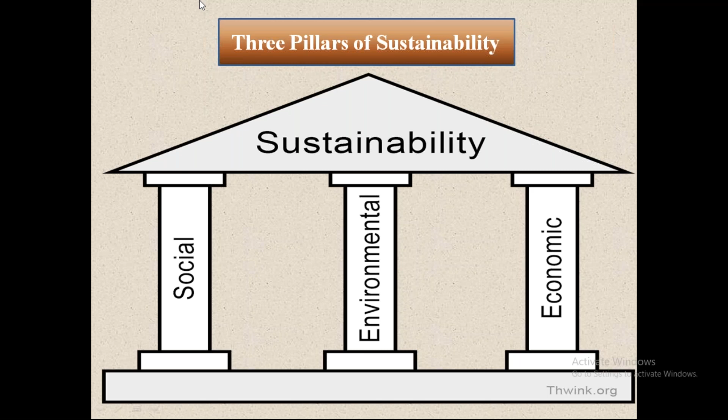Under sustainable development, we have sustainable construction, which is defined as the practice of creating structures and using processes that are environmentally responsible and resource efficient throughout a building's life cycle, from siting to design, construction, operation, maintenance, renovation, and deconstruction.

So there are various ways we can deal with this, and sustainable construction will include methods that use renewable and recyclable sources, reducing energy consumption and waste, creating a healthy, environmentally friendly environment, and protecting the natural environment.

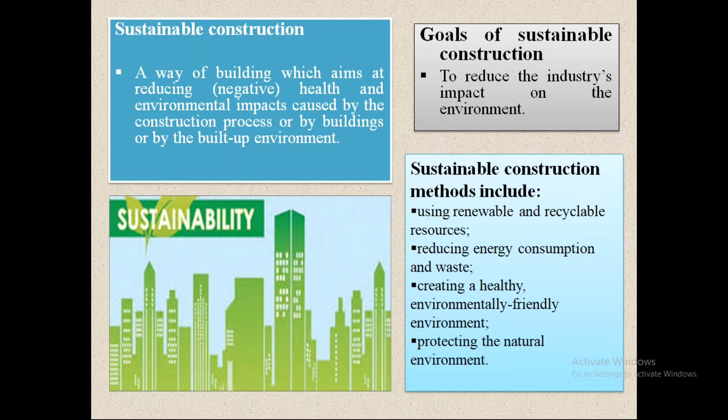So why do you think that wastes are necessary to be incorporated in construction in addition to the regular materials? You can write in the chat box so that once we discuss the wastes, we can move ahead.

Sir, your mic is off, sir. No problem, I'm waiting. I'm waiting for the people to write. Okay fine sir, fine.

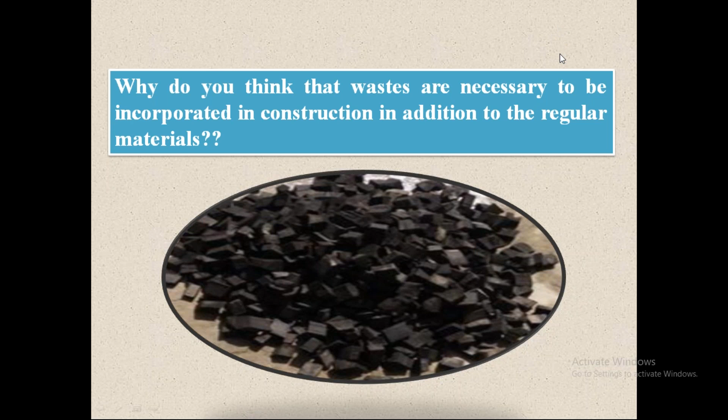As far as wastes are concerned, they are classified into two categories: agro wastes and industrial wastes. Agro waste includes rice husk ash, corn cob ash, and some others like sugarcane bagasse ash and banana leaves ash. Industrial waste includes fly ash, ground granulated blast furnace slag, and silica fume.

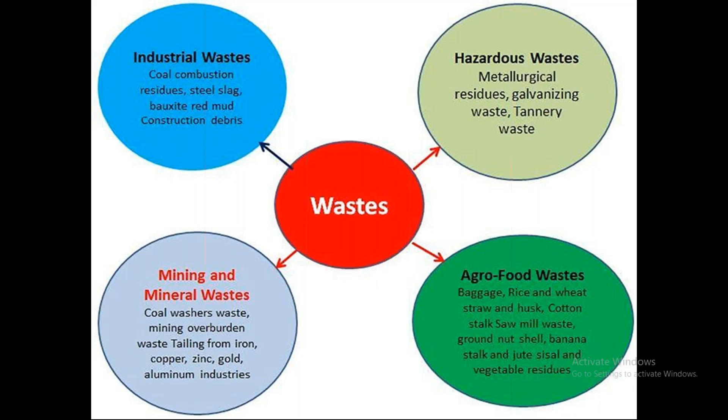So waste can be categorized, and our intention should always be to utilize these wastes. A lot of studies have been carried out regarding these wastes, and we should select the waste in such a manner that we are able to substitute it.

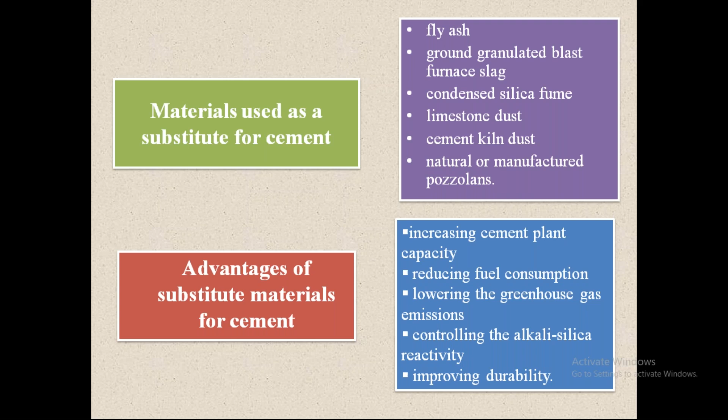As far as cement is concerned, we can use fly ash, ground granulated blast furnace slag, condensed silica fume, cement kiln dust, etc. So what we are doing is substituting materials for cement, reducing greenhouse gas emissions, controlling alkali silica reactivity, and improving durability.

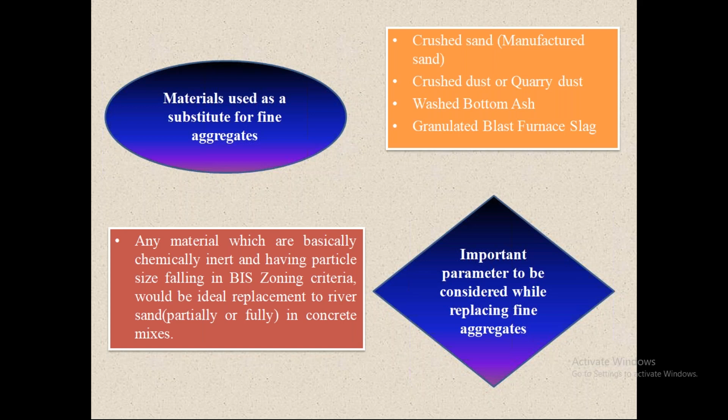Materials we can substitute for fine aggregates include crushed sand, crushed dust or quarry dust, and granulated blast furnace slag. We have to look for the right parameter while replacing materials. When replacing fine aggregates, we need a material that is chemically inert and has a particle size falling in BIS zoning criteria, preferably zone 2, to be an ideal replacement for river sand in concrete mixes. Similarly for coarse aggregates, we can replace them with different materials.

A lot of study has been carried out regarding wastes. Today I'll concentrate on the latest study using only two wastes. First I'll discuss regarding fly ash, and then I'll discuss regarding rice husk ash.

The normal study regarding waste has been published before, but regarding geopolymers, it's a new concept. Only in the last two years has the study started in India regarding geopolymer. We basically carry out geopolymerization, using alkaline activators to achieve geopolymerization. Geopolymer cement concrete is made from utilization of waste materials.

It can be fly ash, it can be rice husk ash, it can be GGBS.

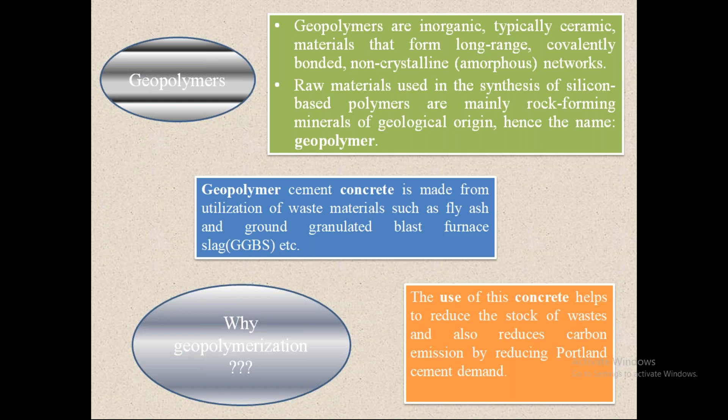In alkali activation, we are mainly dealing with molarity, the number of moles of solute per liter of solution. It is used to express the concentration of solution. The molarity of solution is the way to figure out how much of a specific element or compound has been dissolved or used in a certain amount of solution.

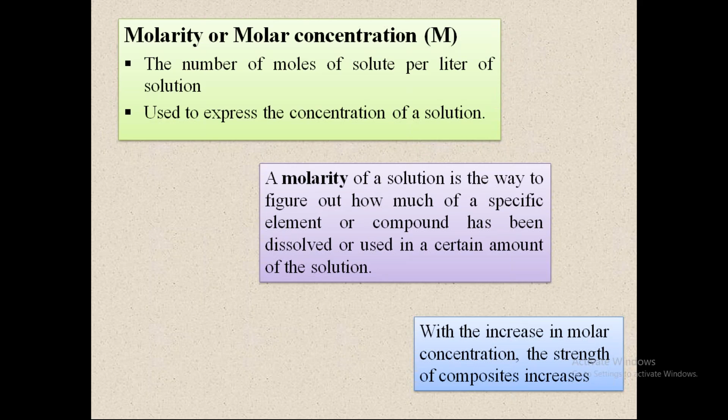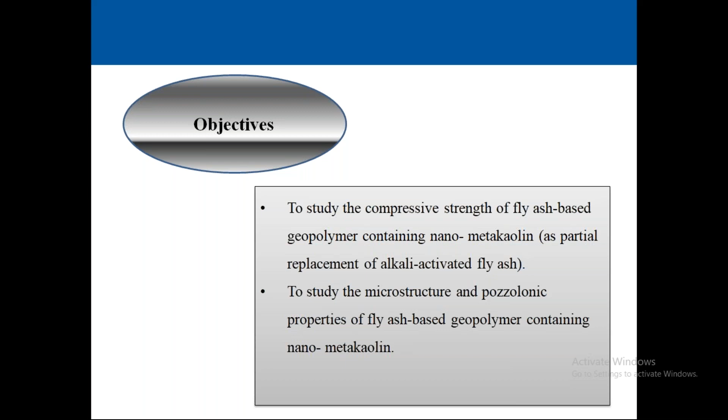So this is what I'll be discussing today, regarding alkali activated fly ash. There are two objectives: to study the compressive strength of fly ash based geopolymer containing nano-metakaolin, and then to study the microstructure and pozzolanic properties of fly ash based geopolymer containing nano-metakaolin.

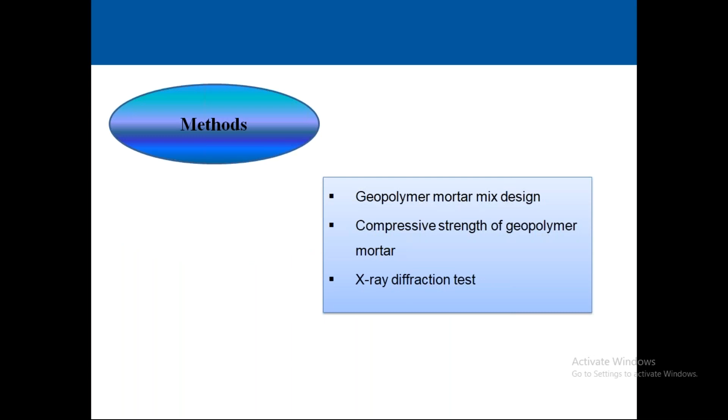So the materials used are fly ash, alkaline activator solution, nano-metakaolin, fine aggregates, and water. These are the methods: geopolymer mortar mix design, compressive strength, then the XRD thing. So geopolymer mortar is a two-phase material similar to conventional Portland cement mortar, consisting of geopolymer binder and aggregates as source and filler materials respectively.

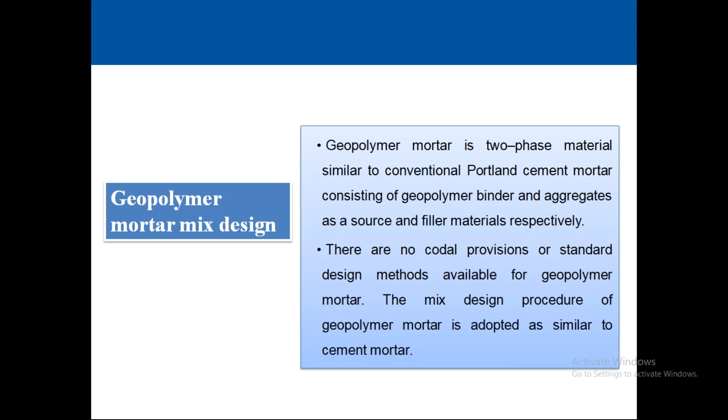There are no codal provisions or standard design methods. So what we have done is we have adopted the same procedure as that of cement mortar, but we have activated the fly ash with the help of alkaline activator, and we have conducted the study.

So the major components which affect the strength of geopolymer mortar mix are geopolymer binder to sand ratio, water to solid ratio, alkaline activator solution to fly ash ratio, sodium silicate to sodium hydroxide ratio, and molar concentration or molarity of sodium hydroxide. All the above discussed ratios were fixed in the study, but the molarity was varied in order to see the effect of alkaline activator solution.

So fly ash samples were prepared regarding geopolymer, and as far as preparation of the samples is concerned, first of all, the standard consistency of the fly ash was determined by taking approximately 400 grams of fly ash, and with the help of a Vicat mold we have done that. Then initial and final setting time was determined.

Preparation of fly ash based geopolymer mortar was difficult because we had to make a lot of trials. First of all, fly ash to sand ratio was selected. Then alkaline activator solution to fly ash ratio was selected, based on the consistency, and it was checked for strength requirement and workability requirement. Then sodium silicate to sodium hydroxide ratio was selected.

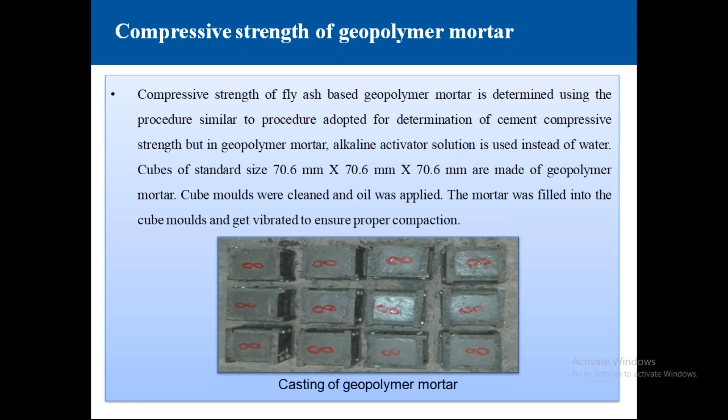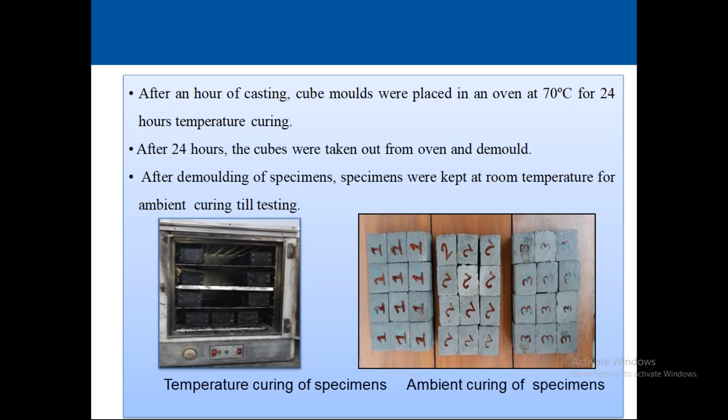Cubes of standard size were used, and after an hour, cubes were placed in an oven at 70 degrees centigrade for 24 hours temperature curing. After that, cubes were taken out, and after demolding, specimens were kept at room temperature for ambient curing till testing. Specimens were tested after 3, 7, 14, and 28 days. The compressive strength of the mortar cubes was found using UTM.

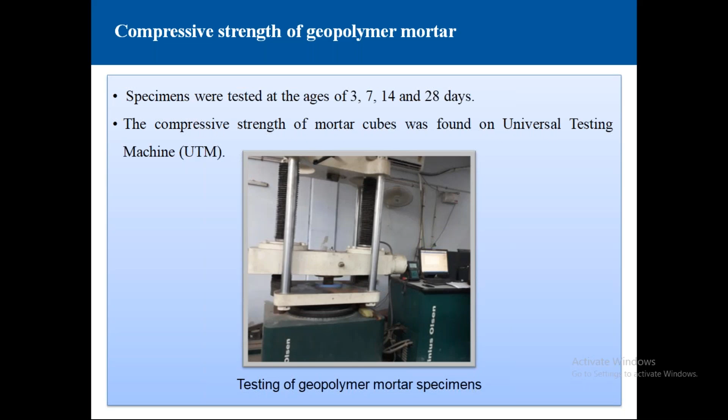So the next part which we have used is regarding X-ray diffraction, XRD. It is a non-destructive test method used to analyze the structure of crystalline materials, and by studying it, we are able to identify the crystalline phases present in a material, and thereby know the chemical composition information. It's a non-destructive analytical technique used for analyzing crystal structure, mineral composition, and unit cell dimensions.

X-ray diffractometers mainly consist of three components: cathode ray tube, X-ray detector, and sample holder. X-rays produced in the cathode ray tube are detected, processed through the X-ray detector, and recorded in the form of intensity. Conversion of diffraction peaks to D-spacings allows identification of the mineral, because each mineral has a set of unique D-spacings.

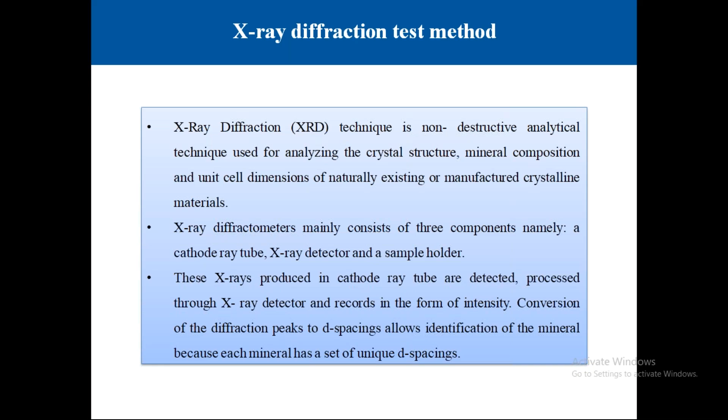This technique is basically primarily based on Bragg's law, that is n lambda equals 2d sine theta, where lambda is the wavelength of X-ray, theta is the diffraction angle of the incident ray, and d is the lattice spacing between the planes in a crystalline sample.

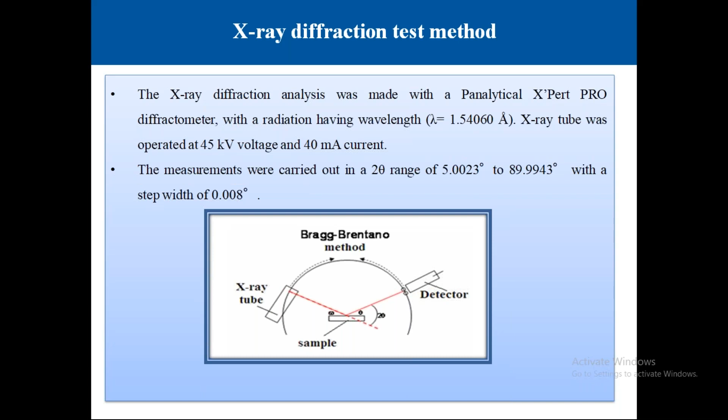The X-ray diffraction analysis were made with a diffractometer with the radiation having wavelength lambda equal to 1.54 angstrom. The X-ray tube was operated at the standard conditions for operating the X-ray diffraction apparatus. These measurements were carried out in a 2 theta range, which we can vary from 5 degree to 89 degree, with a step width of 0.008 degree.

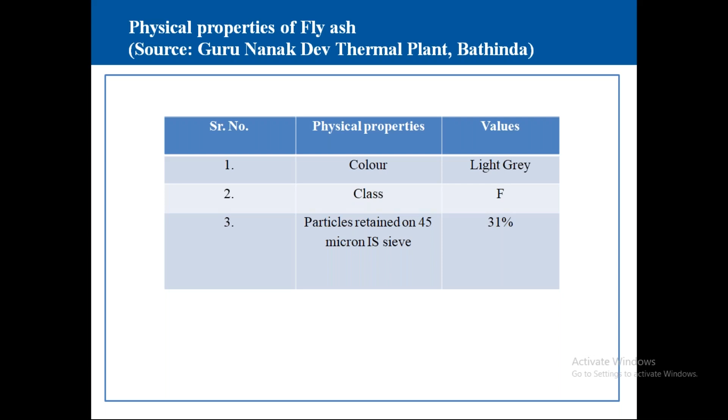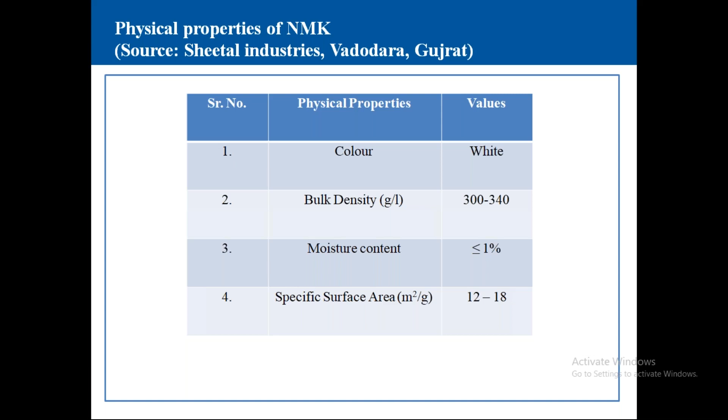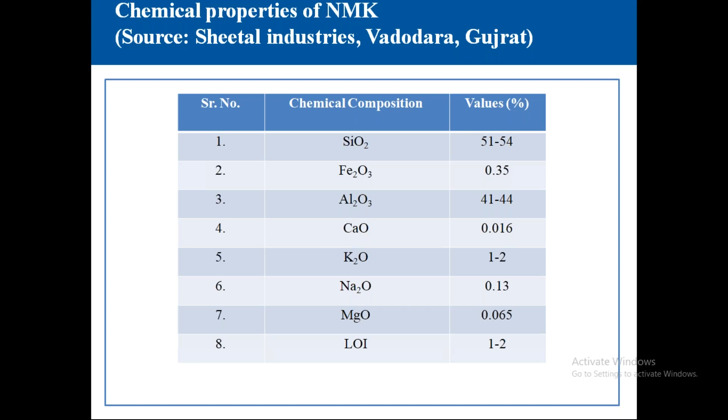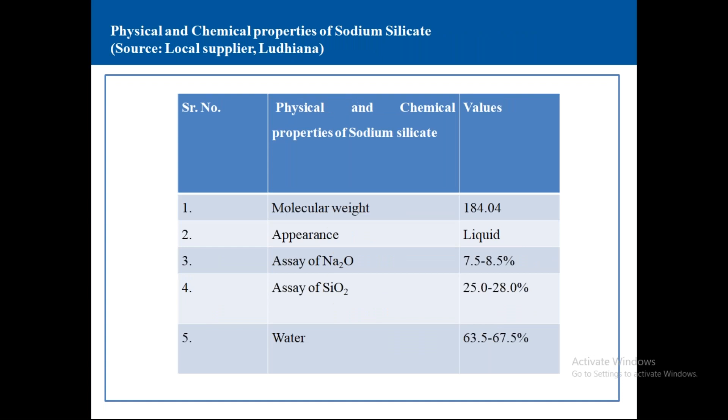Then we have given certain names to the mixes, and to determine the value of compressive strength of fly ash based geopolymer mortar, 18 mixes were prepared by using different molar concentrations. Molar concentrations which were chosen were 12 M, 14 M, and 16 M. So cement and water present in the cement mortar were replaced with fly ash and alkaline activator solution respectively.

The alkaline activator solution to fly ash ratio was kept as 0.4, sodium silicate to sodium hydroxide as 2.5, and water to solid ratio as 0.3 respectively. So in all we have casted 216 specimens of geopolymer mortar, varying molarity of the hydroxide and percentage of NMK with fly ash. So the nano metakaolin was varied from 0 to 10% with different molarity 12, 14, and 16.

Nano metakaolin was replaced with fly ash, that means totaling 100. First of all, nano metakaolin was 0, fly ash was 100%. Then 2, fly ash was 98; 4, 96; 6, 94; 8, 92; 10, and 90. So S1 to S6 correspond to 12 molarity. S7 to S12 correspond to 14 molarity. S13 to S18 correspond to 16 molarity. So this was the designation of the geopolymer mortar mix.

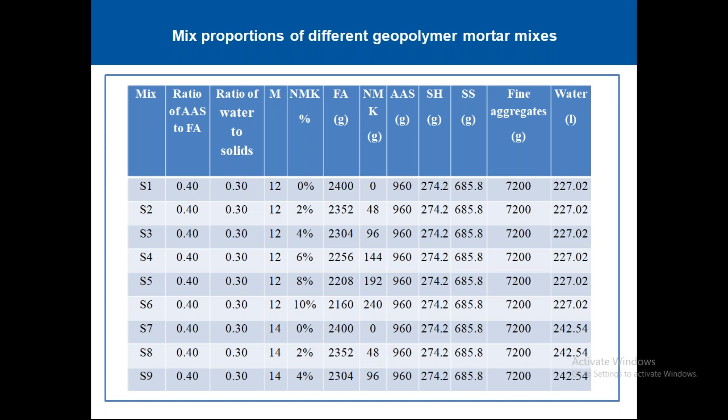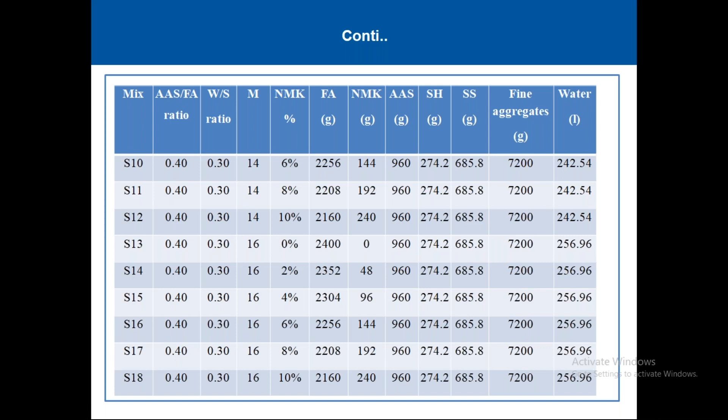Their ratio was also kept as 2.5, depending upon the consistency, depending upon the trials, and depending upon the various research papers. So overall, this was the thing. We have calculated the different quantities, and with the help of alkaline activator, we have casted the samples, and then we have tested the compressive strength.

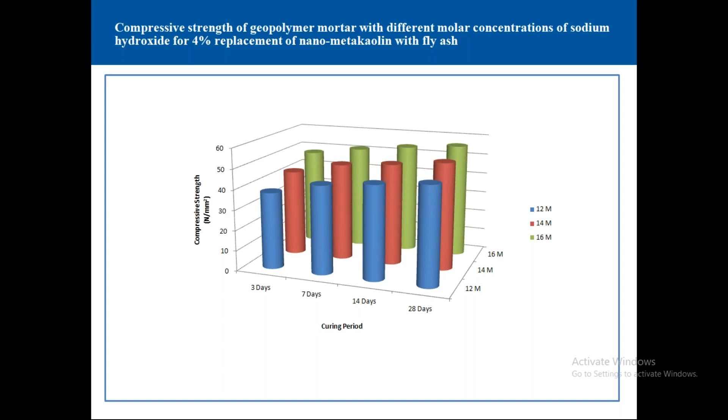Similarly, for 4% replacement of nano metakaolin, 28 days compressive strength of 14 molarity was 1.09 times, and for 16 molarity it was 1.16 times. Again, for 6%, corresponding to 14 molarity it was 1.15 times, and corresponding to 16 molarity it was 1.3 times. Then for 8%, then for 10%.

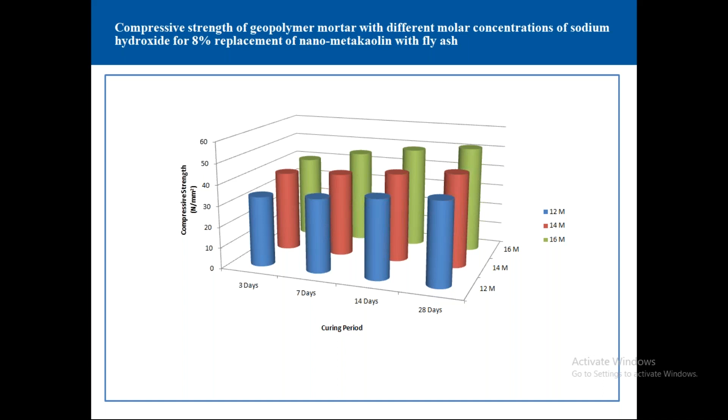So it can be concluded that compressive strength of fly ash based geopolymer mortar is directly dependent upon the molar concentration of alkaline activator solution. As molar concentration increases, it enhances the geopolymerization reaction by escalating the dissolution of alumina and silica present in the source material, which we call fly ash.

The increase in compressive strength of fly ash based geopolymer mortar with different percentage levels of nanometakaolin is due to the contribution of silica and alumina oxide of nanometakaolin (NMK) in the geopolymerization process. There is a significant increase at 4% NMK. It is due to homogeneous dispersion of NMK, leading to formation of nucleation material for geopolymer formation.

A compact structure was formed. However, if the content of NMK is very high, it results in the formation of agglomerates that hinder the contact between reactive components of the geopolymerization reaction. So this is for 16 molarity. For 16 molarity also, 4% NMK was found to be optimum.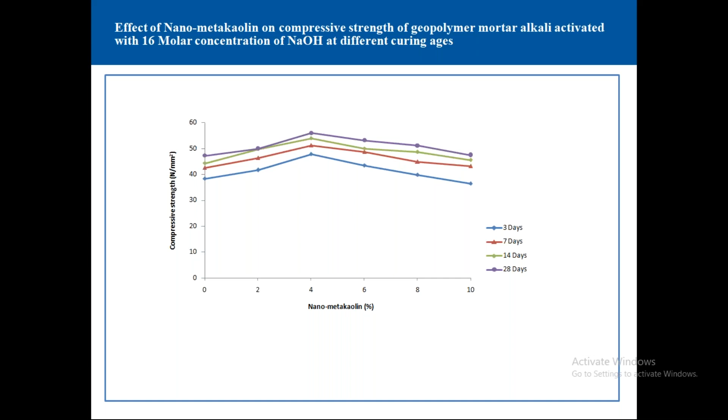Again, after conducting the tests, we performed regression analysis. From the regression analysis, we have computed a graph and formed an equation from which we can find the value of compressive strength for different molar concentrations of sodium hydroxide and for different proportions of nanometakaolin.

So this is the measured compressive strength. Then we have predicted compressive strength. Then we have the residual values. Depending upon those residual values, we can find the integral absolute error. When we say integral absolute error, if it is less than 10%, it is always better. It is considered to be significant.

So this error measures the absolute deviation of experimentally measured values from the values obtained using regression analysis. The range of 0 to 10, as I already told you, is regarded as acceptable. Our value was 5.73%, so it is within the acceptable range.

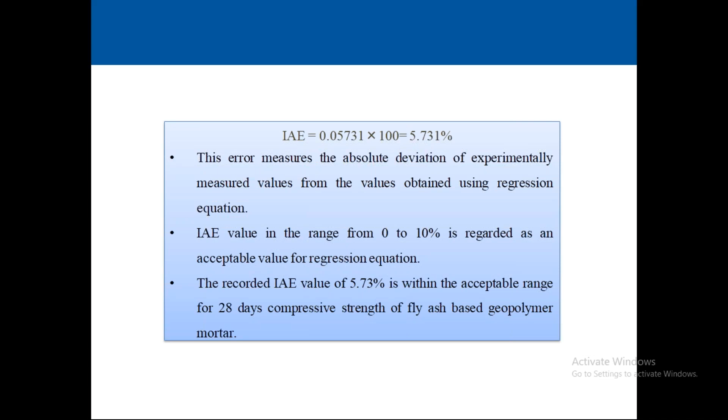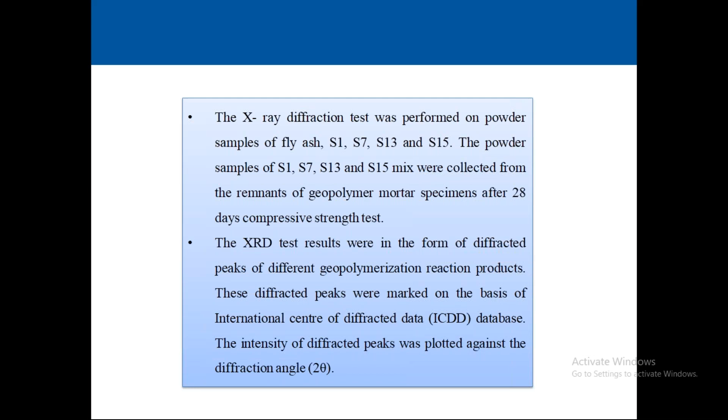So again, the X-ray diffraction test was performed, as I already told you. The X-ray test results were in the form of diffracted peaks of different geopolymerization reaction products. These diffracted peaks were marked on the basis of the International Centre for Diffraction Data (ICDD) database. Intensity of diffracted peaks was plotted against the diffraction angle. So this shows the X-ray pattern.

X-rays are diffracted differently by each mineral based on the atoms present and their arrangement in the crystal lattice of the mineral. If you look at the fly ash X-ray pattern, in its normal state it's mainly composed of amorphous and crystalline substances such as quartz and mullite. This shows there are numerous peaks of mullite and quartz in the crystalline phase.

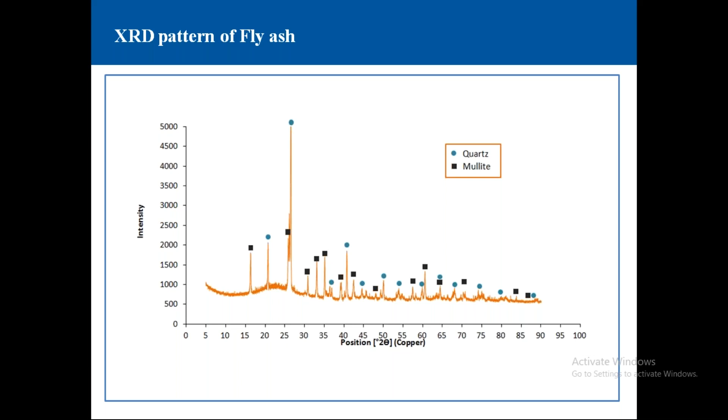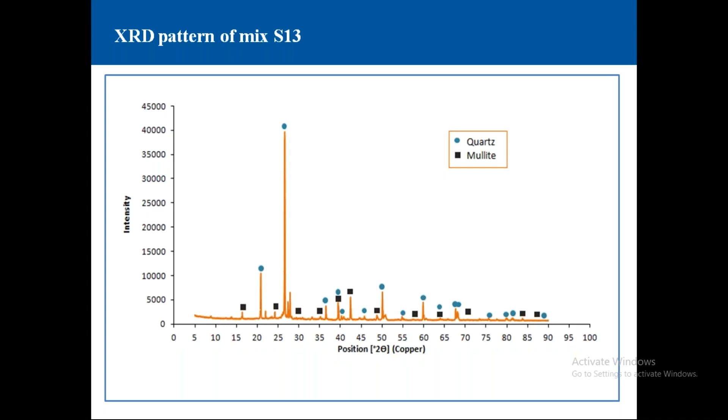So we can say that compressive strength of fly ash based geopolymer mortar directly depends upon the molar concentration of alkaline activator solution. As the molar concentration increases from 12 M to 16 M, compressive strength increases for all curing ages. This is due to higher molar concentration of NaOH, which enhances the geopolymerization reaction by escalating the dissolution of alumina and silica present in fly ash.

The second conclusion concerns activated fly ash. I have intentionally taken activated fly ash because a lot of research has been carried out on normal fly ash, but research on activated materials is scanty. It's the latest thing in research nowadays. We activate the waste and accordingly carry out the research. Activating the waste results in more compressive strength as compared to the normal form.

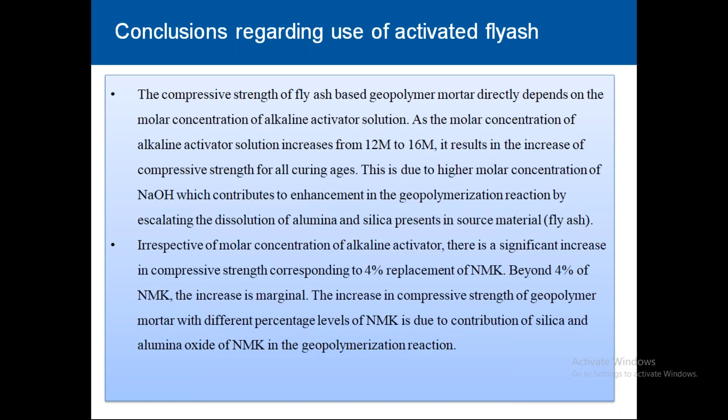So second, irrespective of the molar concentration of alkaline activator, there is a significant increase in compressive strength corresponding to 4% replacement of NMK. Beyond 4%, the increase is marginal. The increase is due to contribution of silica and aluminum oxide in the geopolymerization reaction. XRD test results showed that increasing the molar concentration of NaOH from 12 M to 16 M increases the intensities of filler components, which contributed to the increase in compressive strength.

From XRD test results, it was also observed that with the addition of NMK, the geopolymerization reaction increased significantly and resulted in enhancement of compressive strength. The same trend can be observed from compressive strength results using the machine. So XRD test results are in conformity with compressive strength results.

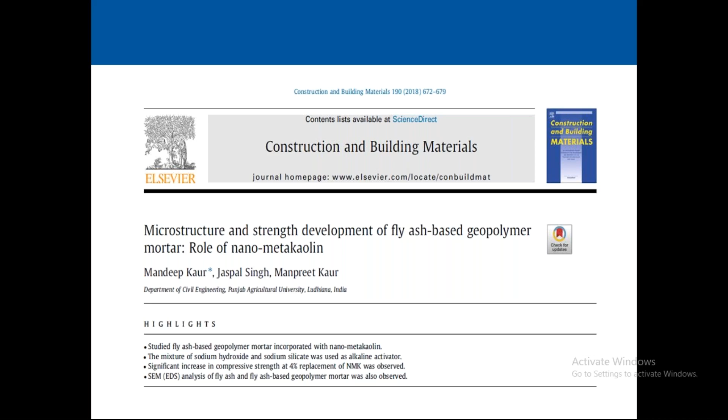So this is the compressive strength relation, and from this we could publish two papers in one of the important journals, Construction and Building Materials, because this nanometakaolin and geopolymer mortar research is the latest.

And the other paper was in Ceramics International. Again, it was synthesis of fly ash-based geopolymer. That means we are activating the fly ash with the help of alkali activators in order to find out its effect on strength, and we have seen that the compressive strength was found to increase with increasing molar concentration of sodium hydroxide and curing period.

Again, we had to do so many trials for this, and we could complete the research and we could publish two papers in important journals. So next I'll talk about activated rice husk ash. Rice husk ash is simple, many people are using it, and many papers have already been published. But alkali activating rice husk ash is something new.

So rice husk, as we know, is the hard protective cover of rice grains obtained from milling. So how many million tons of rice husk is produced annually? Can someone write in the chat box? Approximately how many million tons of rice husk is produced annually? Because it's a great threat, causing damage to the land and the surrounding area.

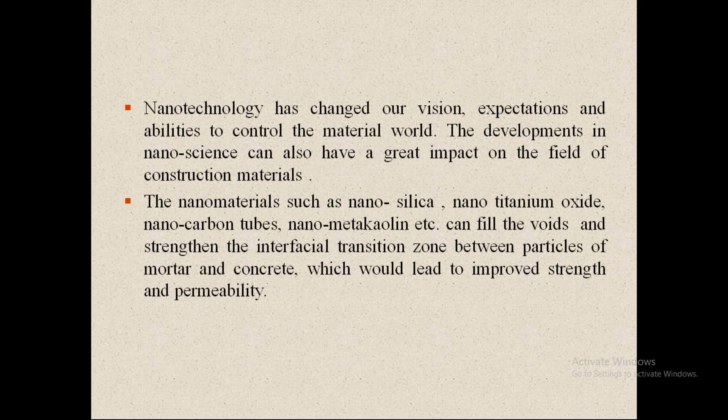So when we are alkali activating the rice husk with alkaline solution, it can be used as a geopolymer binder in mortar and concrete. So again, we are using nanomaterials, which are quite prevalent nowadays, and we are able to improve the strength and permeability using the nanomaterials.

So nano-metakaolin is basically produced by grinding the metakaolin in a high-speed ball grinding mill. It's an ultra-fine pozzolana produced by heating the kaolin at a temperature between 700 to 900 degrees centigrade, which consists predominantly of silica and alumina. The use of nano-metakaolin increases the life cycle expectancy and durability. Nano-metakaolin hikes the compressive strength of concrete and also makes it lightweight.

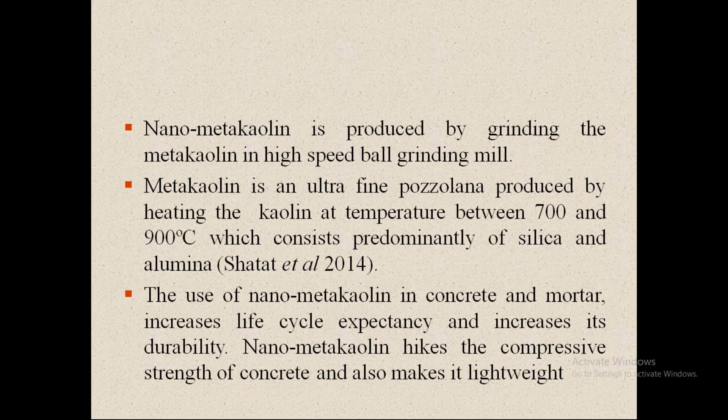So again, this study was dealing with the compressive strength of rice husk ash based geopolymer containing nano-metakaolin as a partial replacement of alkali activated rice husk ash. Rice husk ash is basically an agro waste fallout after burning of the rice husk. It's a byproduct obtained from processing of the rice grains. It has a high amount of silica. Due to this, it possesses pozzolanic reaction, which gives cementitious properties.

The rice husk also has various applications such as silica gel, activated silica, carbon and silicon chips, etc. The physical and chemical properties of the rice husk ash vary from one sample to the other. And our study was to deal with compressive strength and to study the microscopic and pozzolanic properties of rice husk ash based geopolymer containing nano-metakaolin.

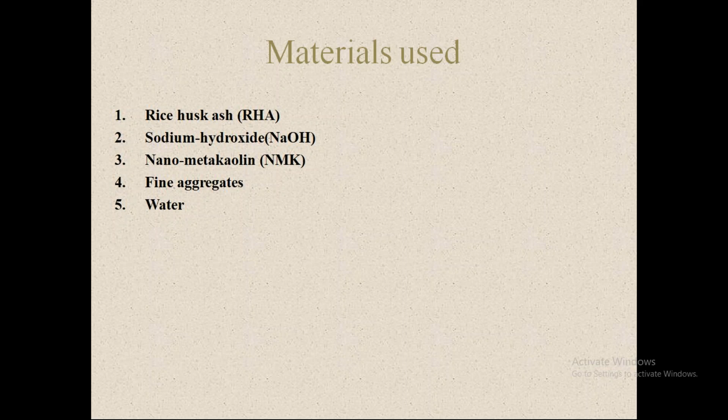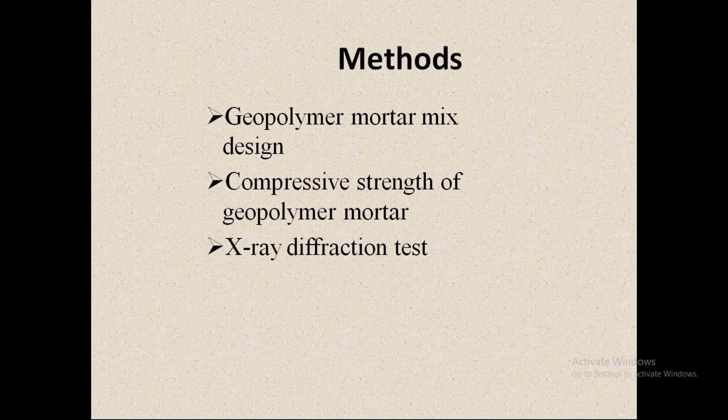So again, the materials used were rice husk ash, sodium hydroxide, NMK, fine aggregates, and water. The method was the same: geopolymer mortar mix design, then compressive strength of geopolymer mortar. Then we conducted the X-ray diffraction test, XRD, in order to see what the chemical compositions are when we activate the rice husk.

So the suitable ingredients of geopolymer and the relative proportions were selected with the objective of high compressive strength. The following factors influence the mechanical, durability, and microscopic properties: alkaline activator to binder ratio, alkaline activator to sand ratio, water to solid ratio, type of alkaline activator, concentration of alkaline activator, and temperature used for curing.

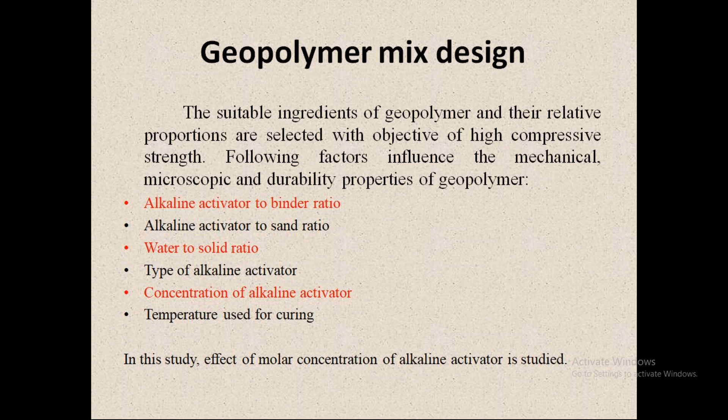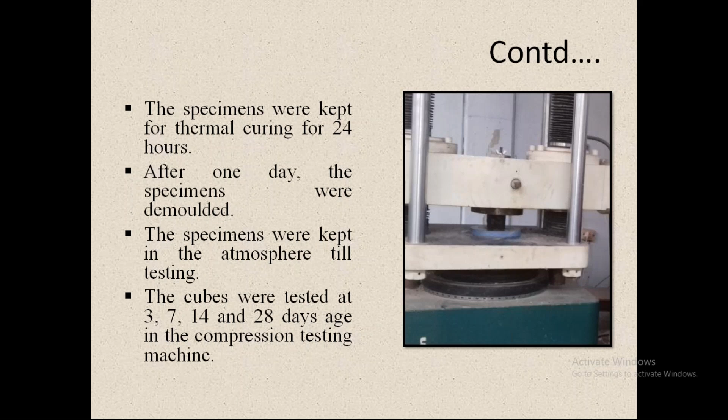So compressive strength of geopolymer mortar was determined as per the similar procedure we have already discussed, using cubes. Geopolymer mortar was composed of 1 part alkali activated rice husk ash and 3 parts sand. Firstly, cube molds were cleaned, which we normally do. And the specimens were kept for thermal curing. After 1 day, the specimens were demolded and tested.

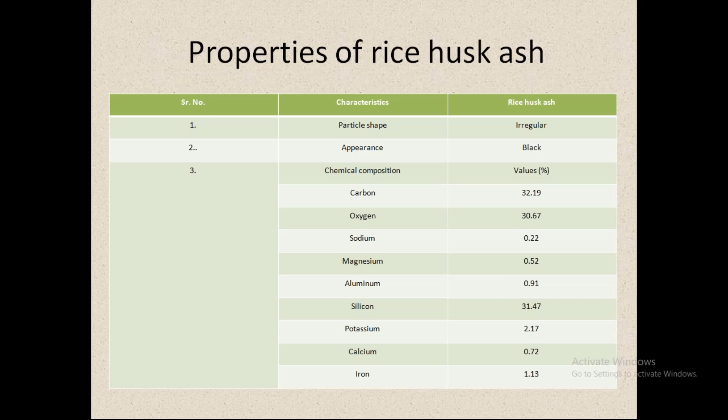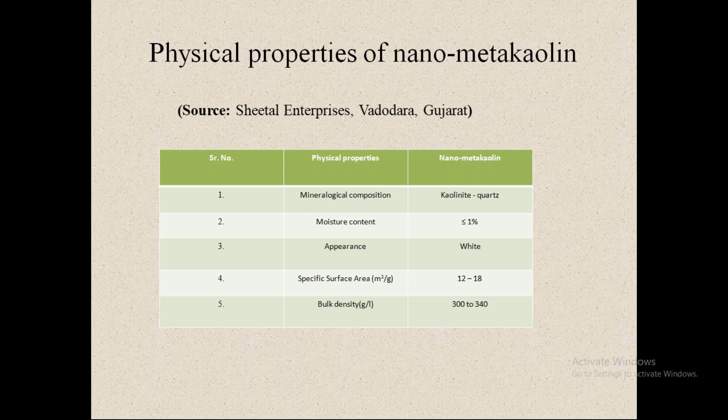So these are the properties of rice husk ash. Particle shape is irregular, appearance, chemical composition, and other things. These are the properties of nano-metakaolin. Moisture content was less than 1%. It is white. Specific surface area is 12 to 18. Bulk density is 300 to 340. The chemical properties are: SiO2, silicon oxide, is 51 to 54%. Fe2O3 is 0.35.

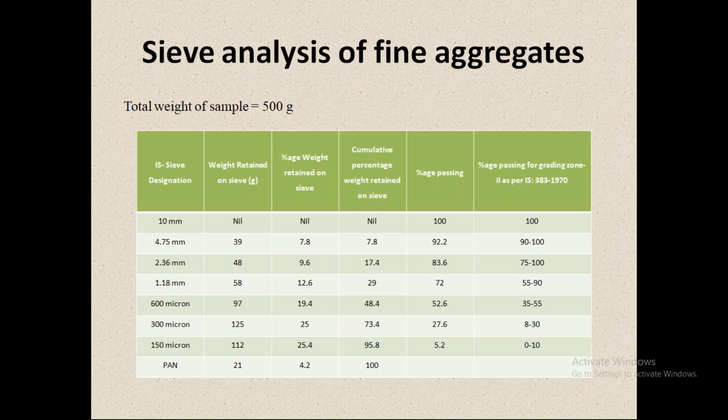So again, the properties were determined, and further simple sieve analysis was performed as far as fine aggregates are concerned. Fineness modulus was determined, and it was seen that the fine aggregates which we are using are conforming to zone 2. Actually, the main important thing is, as I told you, making this geopolymer mix. And the geopolymer mix was designed depending upon the various ratios. And in this design, 216 samples were prepared, because there are 3 days samples, 7 days samples, 14 days samples, and 28 days samples.

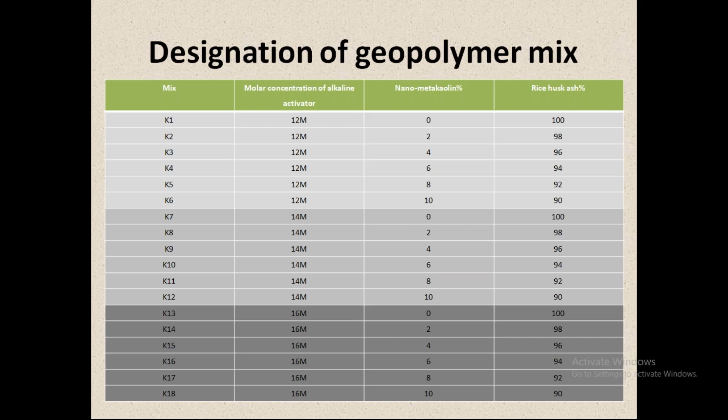As I told you, 216 samples were prepared, and on the basis of trials, we could fix the alkaline activator to binder ratio. We should fix the water to solid ratio, and the compressive strength of rice husk ash geopolymer mortar was determined for different days: 3 days, 7 days, 14 days, and 28 days. So this shows the compressive strength of the mortar prepared with alkaline activator and 0% nano-metakaolin.

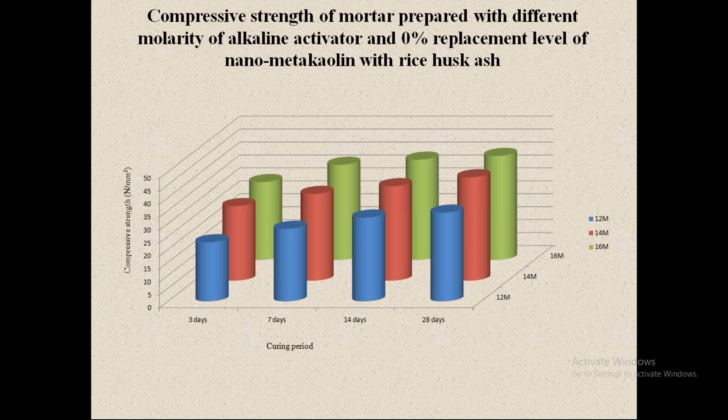The compressive strength of all the mixes was determined at 3, 7, 14, and 28 days for various replacement levels of nanometakaolin with rice husk ash and prepared with different molarity of alkaline activator. The values at the end of curing periods are given, and it is seen that the compressive strength values at 0% geopolymer mortar increase with the molar concentration of alkaline activator. Similar trend was observed in geopolymer mortar containing 2% and 4%.

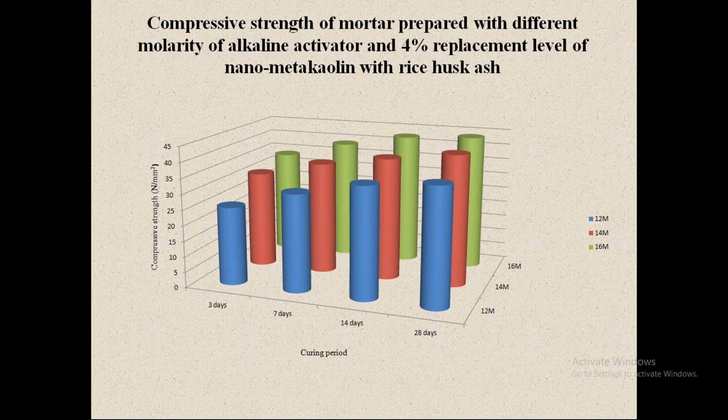As far as this sample is concerned, for 2% replacement of nanometakaolin, the percentage rise in compressive strength was 11.48% and 16.2%, 24% as compared to the mix with 12 molarity. That means with 14 molarity it was more, and 16 molarity was still higher. And when we replaced it with 4%, again there was an increase. The increase was 12.33% for 14M and 16.61% for 16M. Again, for 6%, a similar trend was observed.

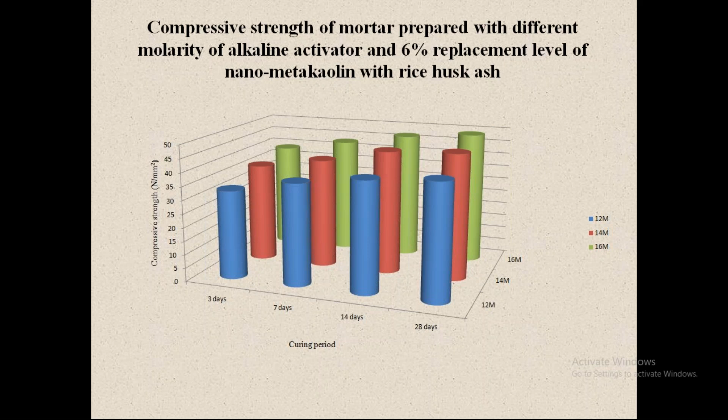So there was an increase in compressive strength with increase in molar concentration of the alkaline activator. Basically, this increase is attributed to the high dissolution of rice husk ash, which is prompted by higher concentration of sodium hydroxide. When we are activating the waste, we are actually improving its properties. Similarly, it was with 8 and 10%, and with 12 molarity, the effect of nanometakaolin on compressive strength was determined for 3 days, 7 days, 14 days, and 28 days. The percentage of NMK was taken as 0 to 10%, at steps of 2%. So this is as far as 14 molarity is concerned.

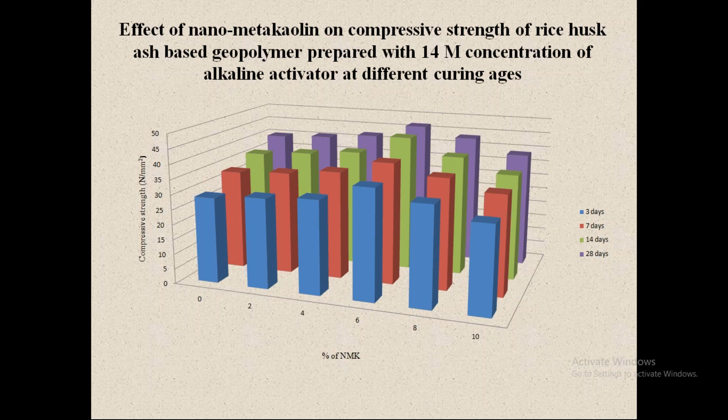So for 14 molarity, basically we concentrated on 28 days, and the XRD test we performed for 28 days. Then we derived the prediction equation, which is given by 18.742 plus 0.210 x1 plus 1.520 x2, where x1 is percentage of nanometakaolin and x2 is concentration of alkaline activator. The reliability of the given relation was checked on the basis of integral absolute error, which is determined from the observed values and estimated values: sigma of square root of (OI minus EI) squared divided by sigma OI.

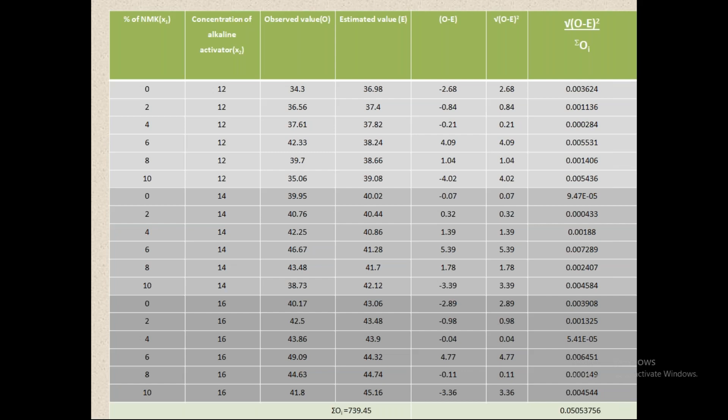If the value of IAE is 0, that means the estimated values are equal to the measured values. If it is between 0 to 10, it is regarded as an acceptable value for a regression equation. So these are the values. The value comes out to be 5.05 percent, so it is less than 10%. That means our prediction equation is correct.

So further, the X-ray diffraction test was performed on 4 samples: K1, K7, K13, and K16. The powdered samples were collected from the mortar specimens after the 28 days compressive strength test. Then it was tested in the laboratory. XRD results were presented in the form of diffracted peaks of different geopolymer products. The intensity of these diffracted peaks was plotted against the diffraction angle of 2 theta.

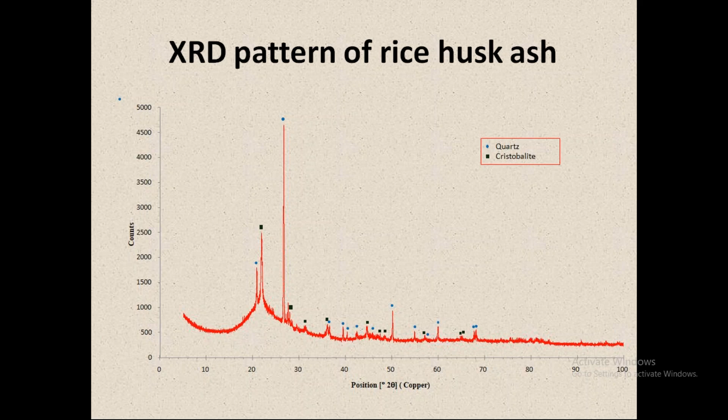XRD shows that the main constituent was SiO2 in the form of quartz and cristobalite. The major peaks of quartz were observed at angles, mainly if you look at here, approximately 20.75 degrees and 26.8 degrees. So XRD shows that wherever we have a hump located, when it disappears, this means that there is a complete reaction of rice husk ash.

There is significant increase in the compressive strength when the rice husk ash was replaced by nano-metakaolin up to 6% in geopolymer mortar. Beyond that, there was reduction in compressive strength. The maximum compressive strength was obtained from mix K16 prepared using 16M concentration. So again, an equation was found, and integral absolute error was determined.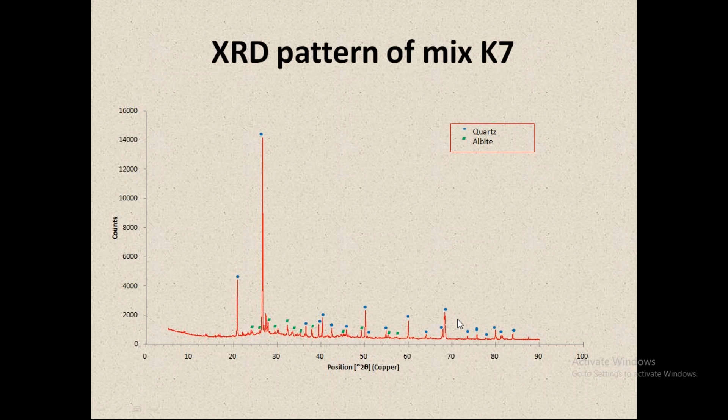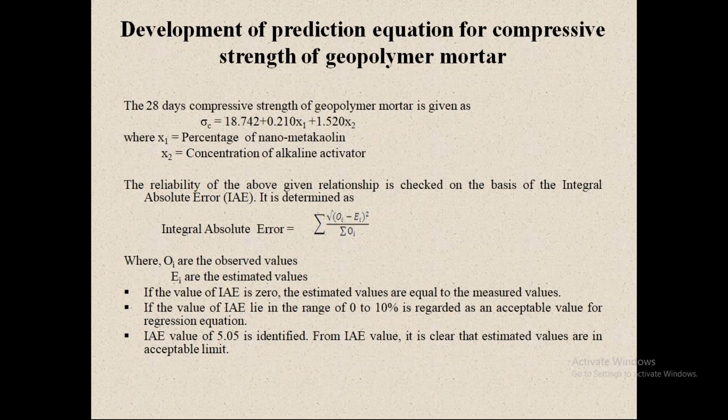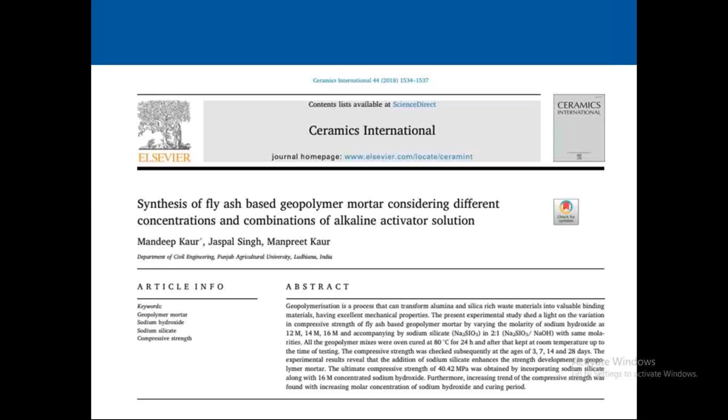Whenever you are doing any experiments, you should try to formulate an equation so that you are able to see whether the equation which you have formulated is valid or not. So this is quite a useful thing, and you may not have seen it in papers before. We also got to know from foreign authors' papers that we can find such things out in order to validate our studies. Any more questions, please?

Chat. Anyone else who wants to ask some question regarding what sir has covered up to now? You can please ask.

Nowadays a lot of study has been done regarding waste. Regarding alkaline activator, studies are less. Only during the last 2 years can we see some papers regarding this. So if anyone is pursuing a PhD, nowadays the trend is use of nanotubes. One should try to use nanotubes along with some waste and find out the compressive strength. This is even better than this alkaline activator.

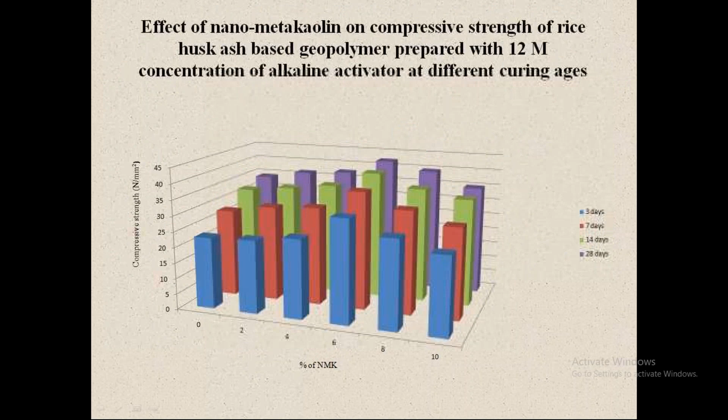So we are talking of waste, isn't it? Yesterday only I was looking at that we can also use plastic waste in road construction. Though it has been used in Punjab also, it has now been used in many roads, and there are many benefits for that.

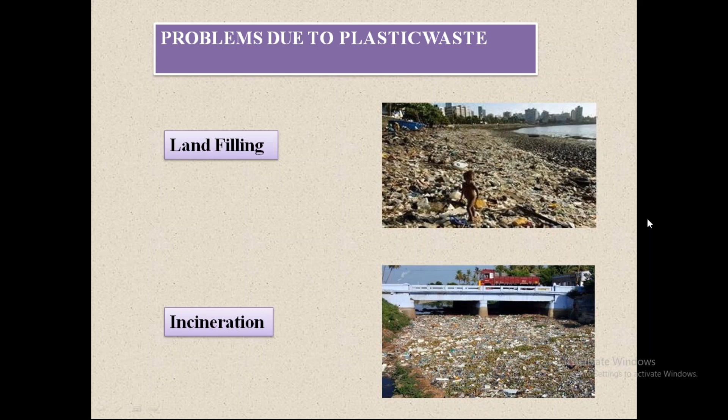There are a lot of problems due to plastic waste, and if we want to reduce this, we have to make use of this plastic as well as other waste materials in any fashion which is useful to us.

So the solution is that we can have a plastic bitumen road. We can even have multi-layered plastic roads. These are being constructed, and the cost is also less, and at the same time we can reduce the waste. The raw materials for road construction, as we already know, are aggregates, bitumen, and we can use waste plastics.

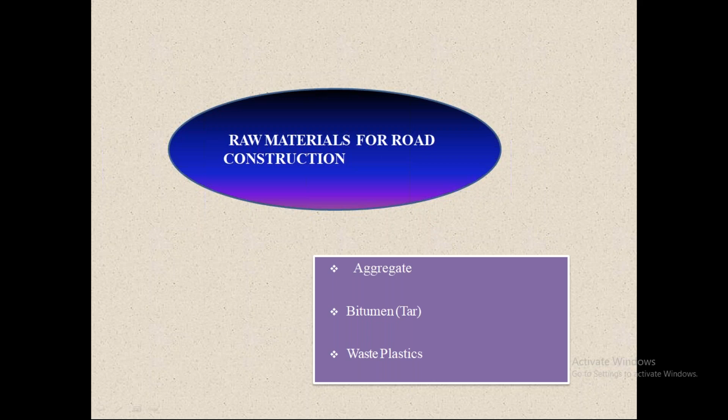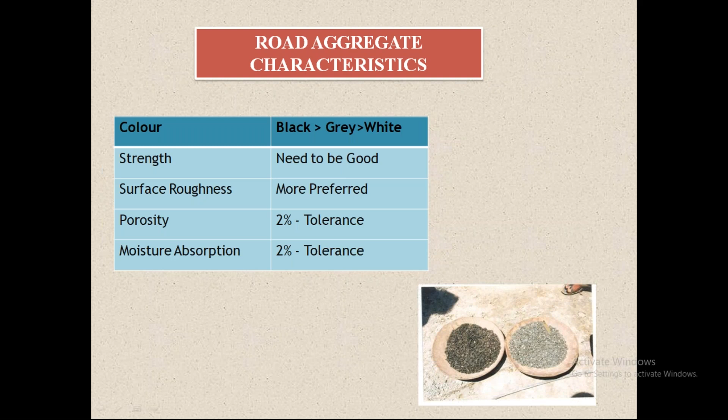For road characteristics, surface roughness is more preferred. Tolerance for porosity is 2%, and moisture absorption is also 2%. So these are the aggregate characteristics.

The process involved in producing waste plastic flakes: first of all we should segregate, then we should clean, then the shredding process and collection process.

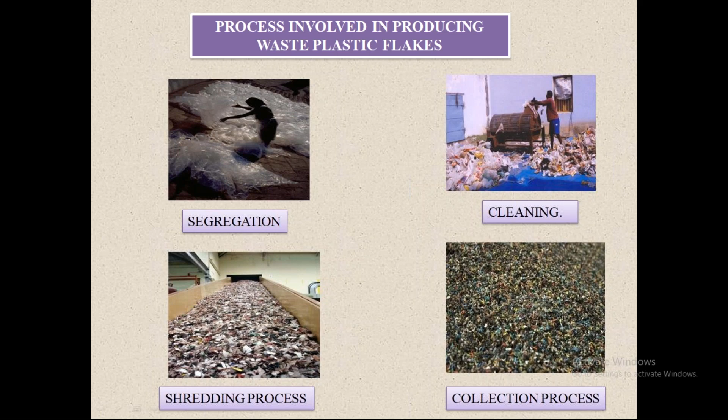Plastic is a good binder. If we increase the plastic coating percentage from 10 to 40%, there is significant increase in compressive strength, from 250 to 320, and bending strength also increases from 325 megapascal to 390 megapascal.

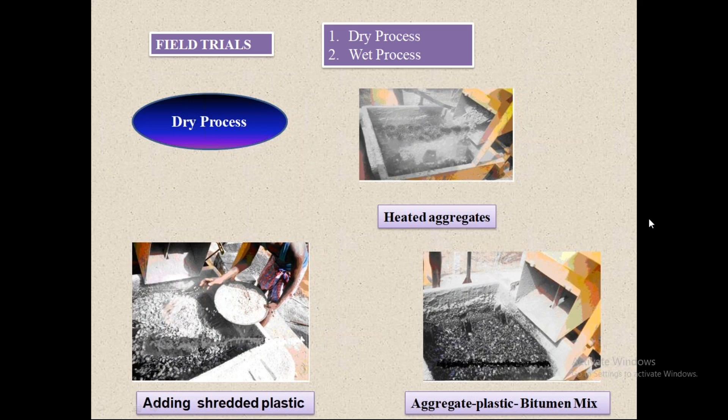There are two methods, dry process and wet process, and we can make use of these plastics in roads. If you look here, black is bitumen, blue is polymer, and gray is aggregate.

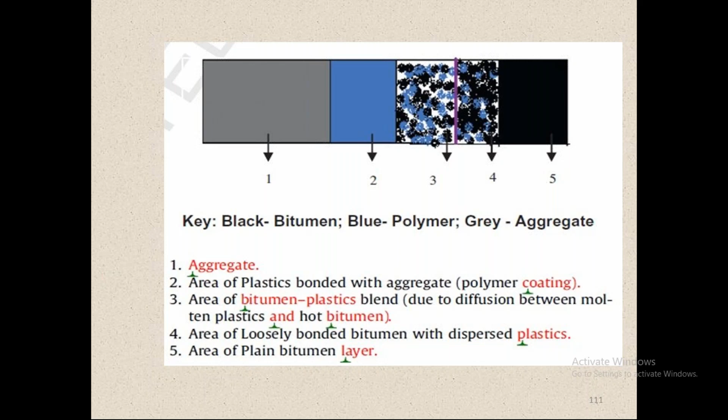First is aggregate. Second is the area of plastics bonded with the aggregate, that is polymer coating we have. Then the area of bitumen plastics blend, and we are able to have the blend. We can use the loosely bonded bitumen with dispersed plastics, and we can have the plastic road because plastic improves the aggregate impact value.

This is just to highlight, this is not a practical thing. I've just noted this down from the internet, that there are certain advantages of plastic roads.

That means we are able to use higher percentage of plastic waste. We are able to reduce the need of bitumen by about 10%. We can increase the strength and performance of the road. We can reduce the cost. Definitely, we can generate jobs for rag pickers. We can develop a technology which is eco-friendly.

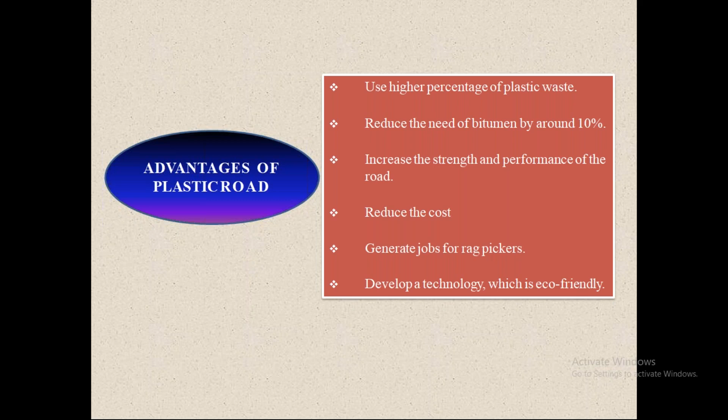Of course, there are always disadvantages also. When we are concerned with advantages, we are also concerned with disadvantages. So it will start leaching, and the presence of chlorine will definitely release HCl gas.

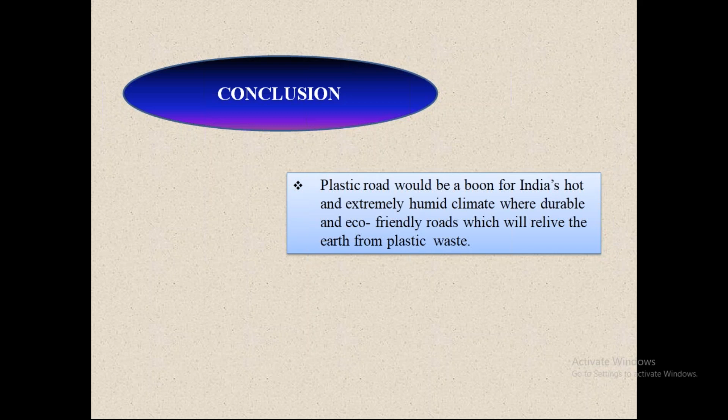So plastic road will be a boon for India's hot and extremely humid climate, where durable and eco-friendly roads will relieve the earth from plastic waste.

Our Chief Minister also, last year, we had this Tandurust Punjab mission with the spirit of Swachhta Hi Seva 2019. It was a campaign to save the future.

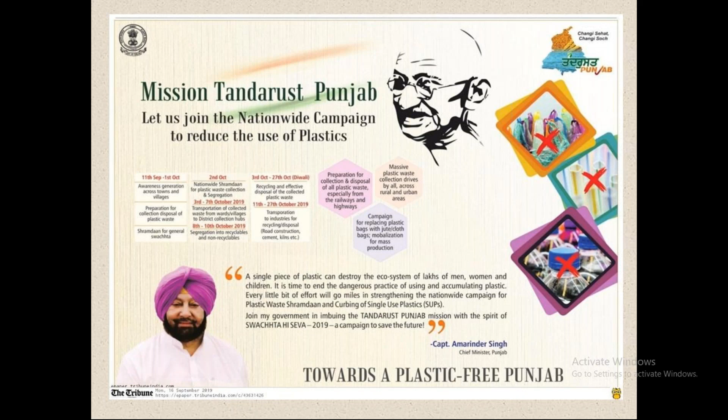So we should all move towards a plastic-free Punjab, or rather towards a plastic-free country, because I'm happy that people from 15 states are attending this short-term course, and they will also agree that if on this day, Engineers Day, we take a pledge that we have to use no plastic, at least in our houses, we can move towards sustainable construction, or we can move towards making and saving the environment. We can save our planet, and this is what the role of a great engineer should be.

We should all move towards utilizing the waste in the best possible manner so that the cost is minimized, so that the problem of depletion of materials is not there, so that there is less carbon emission, and with that we will be able to have sustainable construction, we will be able to have sustainable development, and as we have already discussed, sustainable development depends upon social, environmental, and economic effects.

That means it rests on 3 P's: people, planet, and profit. When we say people, we are concerned with the social thing. When we say planet, we are concerned with the environment. And when we say profit, we are concerned with economic. That means there are basically 3 pillars of sustainability. And if we utilize the waste materials in the best possible manner, we will be moving towards sustainable action. With that, I thank you one and all.